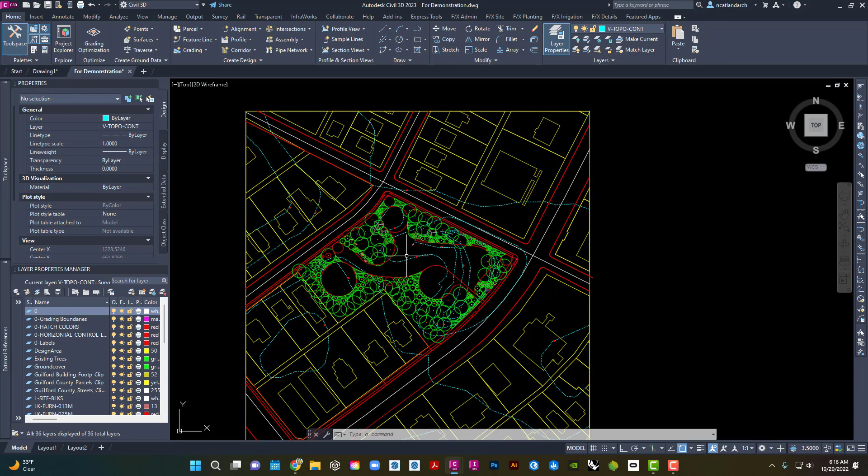First thing I'm going to do is make sure I'm on the horizontal control layer, and I'm going to trace out the outline. I can see it's not traced out, so let me clean that up some too.

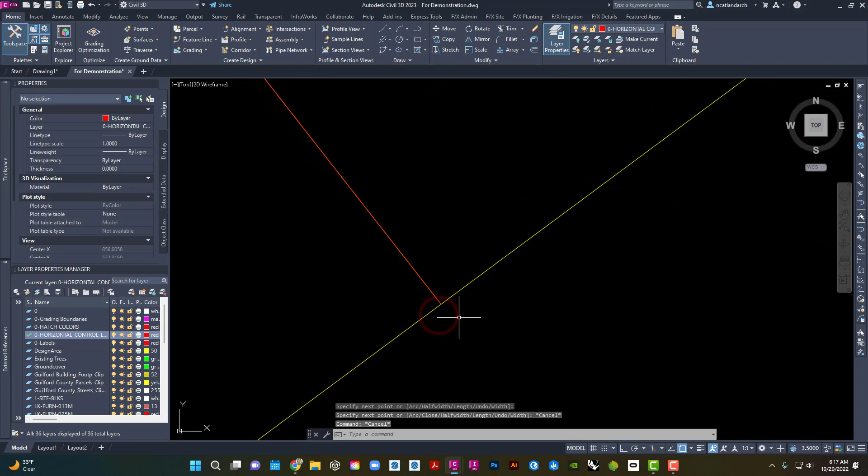I'm actually going to extend that straight through. Okay, cool. Now I'm going to isolate those.

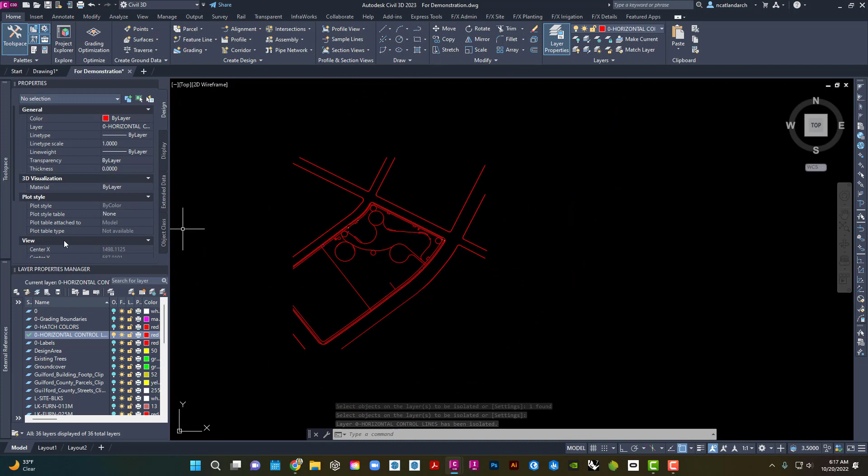The design area too, I'm going to go ahead and just put this on as a reference. I know for some reason this was acting funky — it's a 3D poly, that's why. I don't know if I can flatten this or not. No, does that work? No.

So I'm just going to do a REC and just draw in another. I'll turn the design area off.

That's fine. Okay, now these things, because we're going to make these roads too, I'm going to make sure it's clipped properly. I'm just going to do an offset, hit T for through, and just a little bit.

And I'm going to delete this one. Then I'm going to do a command called EXTRIM — click here, click on the outside, and it should cut everything away.

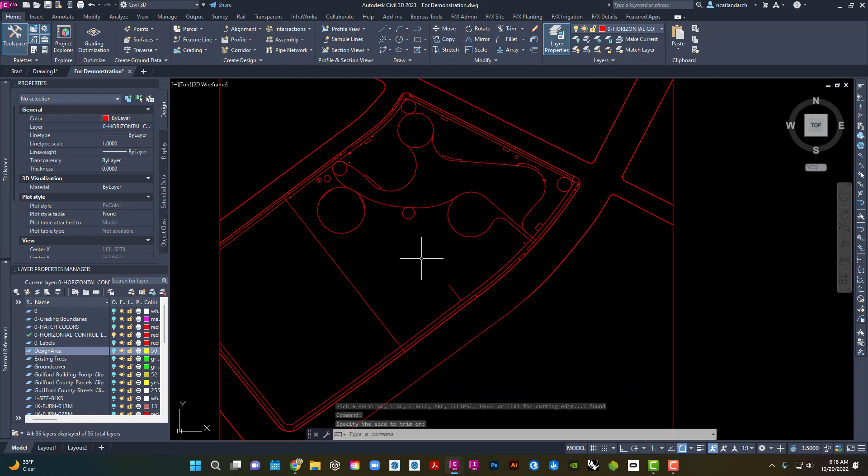Okay, now I'm going to clean some stuff up — not sure what that line is. It's very important this is done. I'm going to do an overkill first, and this is going to delete any overlapping lines. So three overlapping objects were deleted.

That's good. And then things like this and things like this you want to fix here, so I'm going to trim.

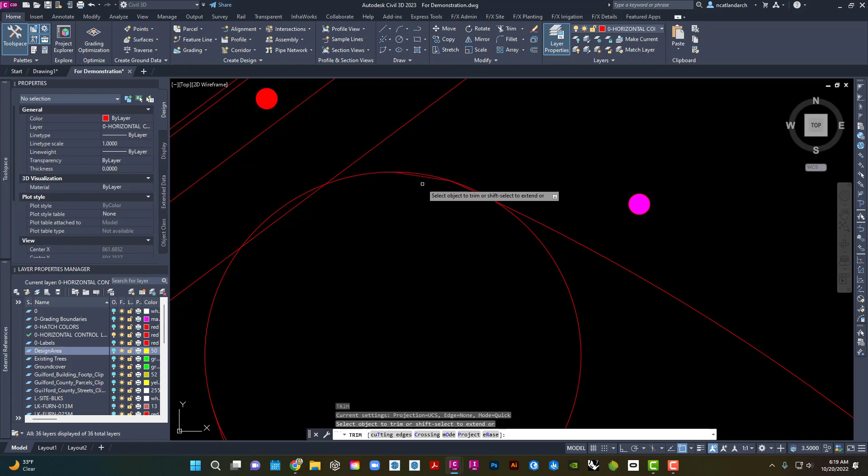Actually I'll do a break for this one, and then just extend it here, overlapping like that.

It looks like it's connecting. That looks good.

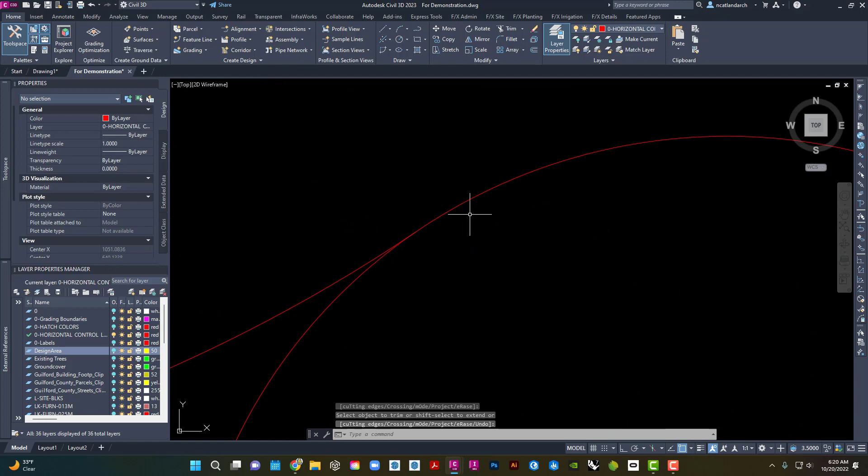Okay, so over here I'm going to have this thing. That looks pretty good to me. Just trim that out.

Make this a little bit bigger just for the sake of it.

You should also move your elements. I think there's that electric utility wall box that's on site, so you want to make sure those things are placed appropriately.

So I'm going to delete. I'm actually going to move this over.

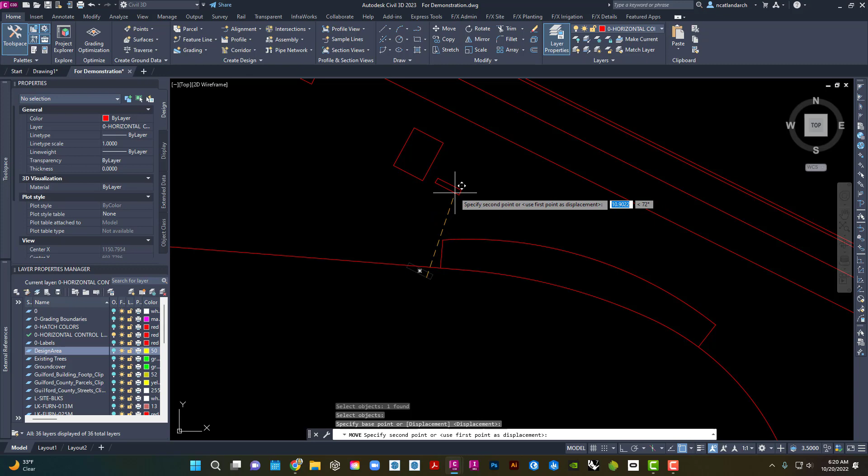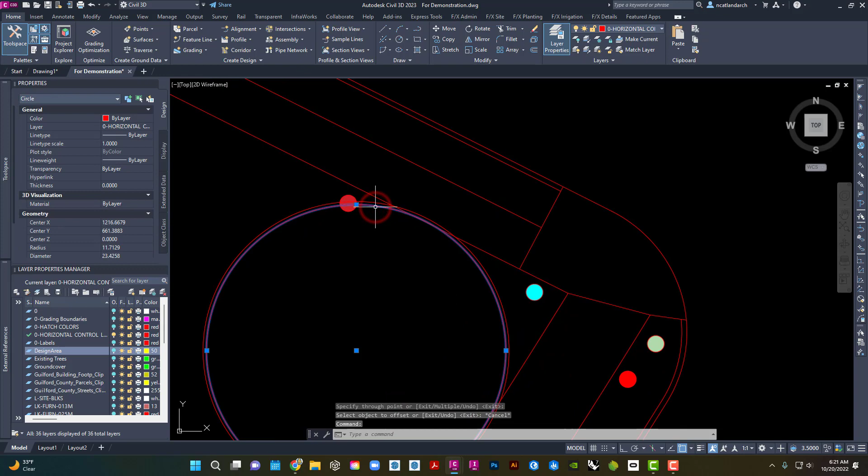Or maybe you're clever and you build it into the bench, and we just delete it. And then this one, offset a little bit too — and we offset a little bit more.

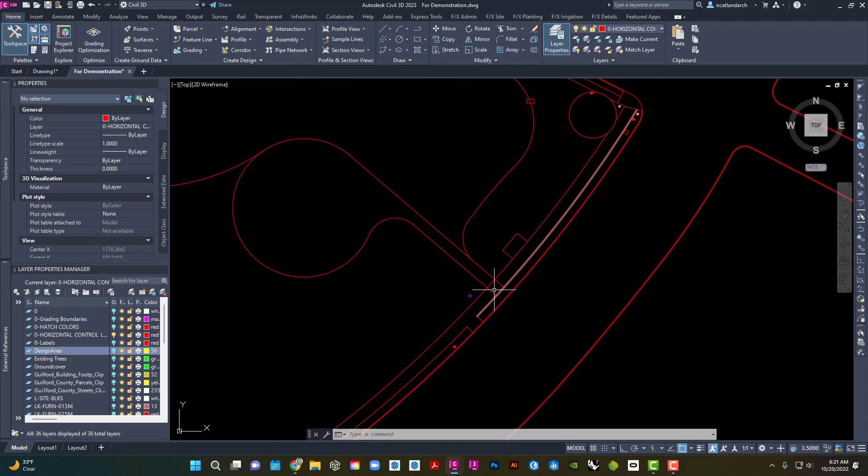And then if there's steps and stairs and things, I believe Abby has that in this one — you need to put those things in here now as well. I'm going to let this ride so we can just see it, but that would need to be done.

Okay, and I might just do one more overkill.

Okay, and I think I can do a thing called an audit as well — fix any errors, yes. Okay, cool, so we're in good shape.

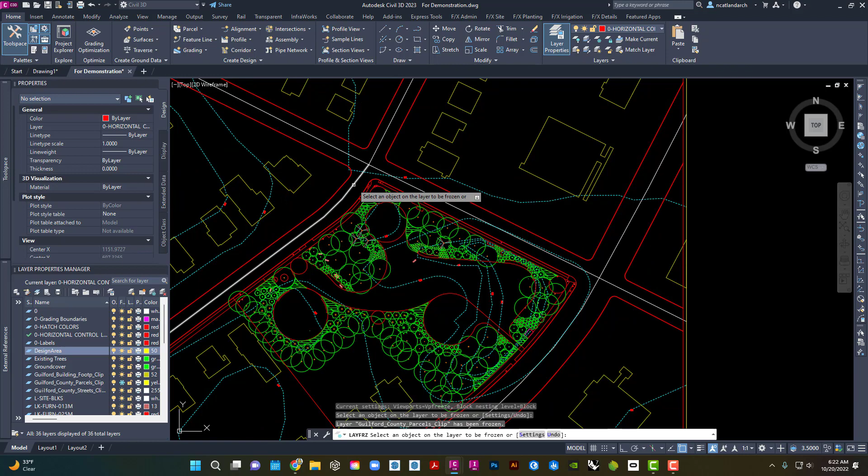Now what I want to do is just do a layer on again, because I want to isolate the layers that I want for this — layer freeze. I don't need that, I don't need the center line, I don't need contour labels, and I don't need the design extents. Okay.

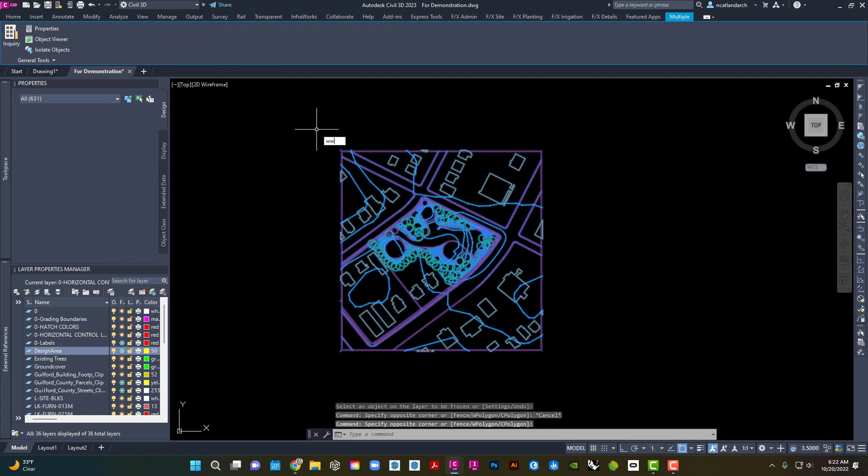So now what I'll do is just create a W block from this. Desktop, I'm just going to say that's fine. I'm going to say V2. Okay, yes. Okay.

Now I'm going to go to my SketchUp. I've modified my template so that when it comes in all the way. Alright.

I don't have any profiles on — my dashes are on, but profiles are off. I'm going to go File, Import. Options, make sure my feet, and say Import.

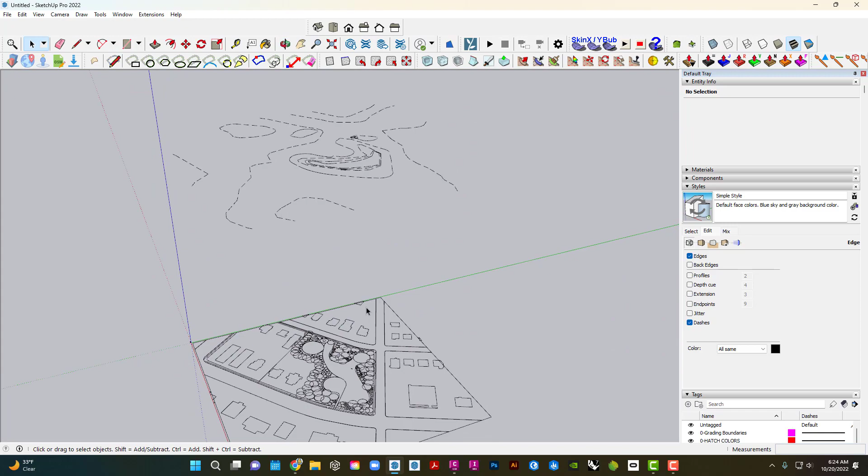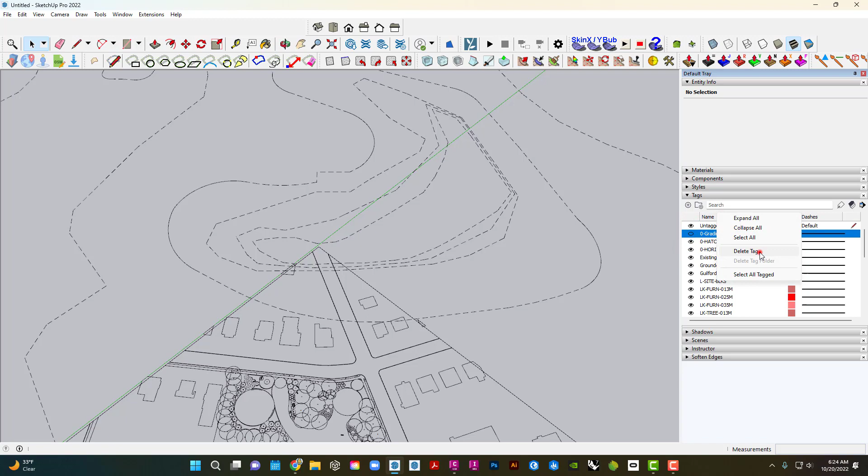Okay, there we go. I'm going to click on this and explode. This layer, I believe, is my grading boundaries, so I'm going to get rid of those over here. Just delete that tag and delete those entities. Okay.

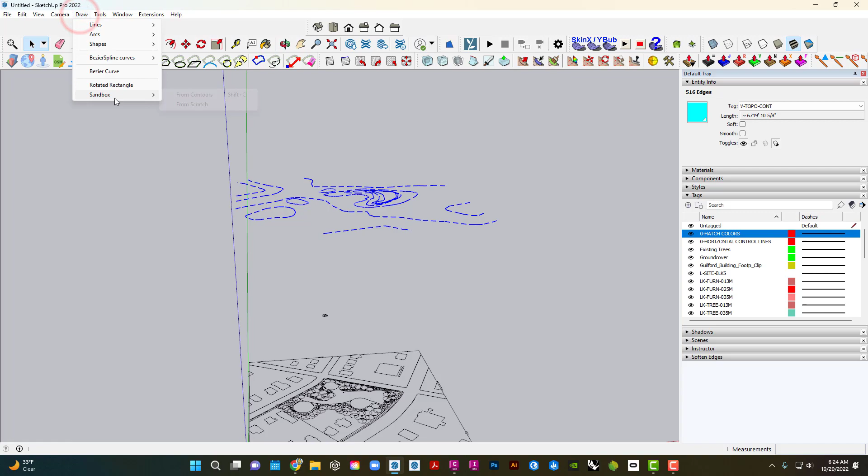So I'm going to grab these geometries and I am going to go to Draw, Sandbox from Contours, and get my terrain mesh.

Now, what I want to do is drape this information onto that. I'm going to turn off my plants and trees, even the contours for now, and again I want to focus on — I'm going to turn off my buildings as well, and I just want to focus on also this ground covers, the horizontal controls, this flat work if you will.

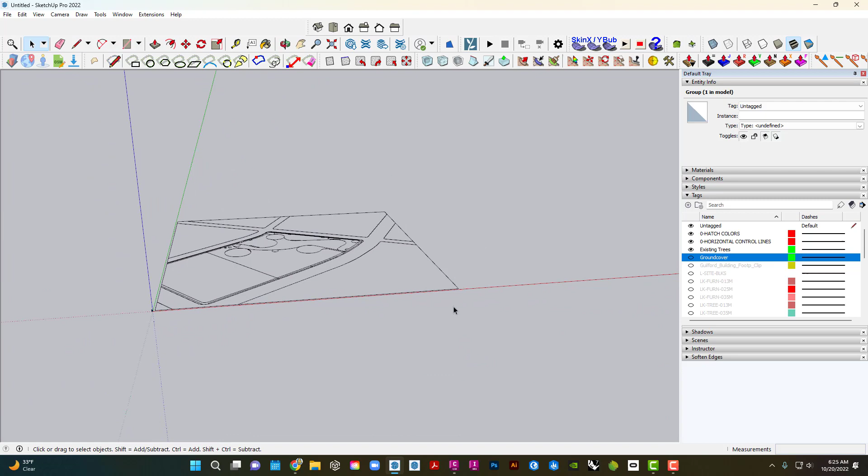Okay, so then I'm going to grab that line work — oops, grab the line work — and I'm going to go to drape, drape the information. Okay.

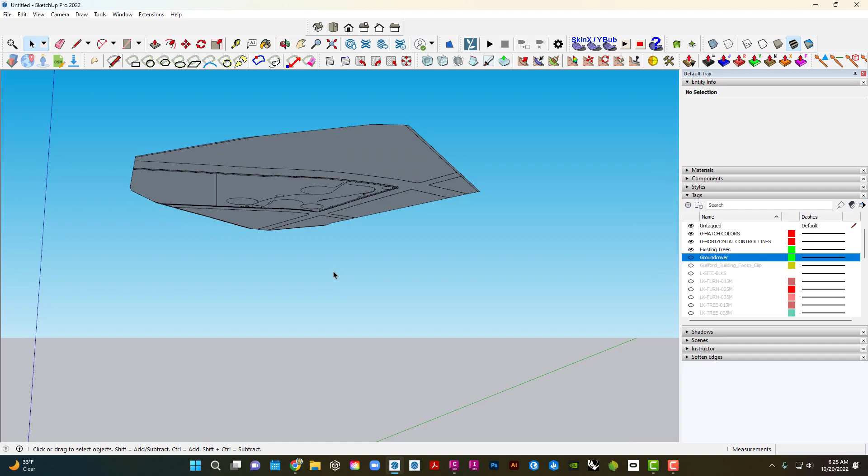So let's see what we have here. So it didn't make faces on everything, unfortunately, so I'm just going to explode this so we can more easily access it.

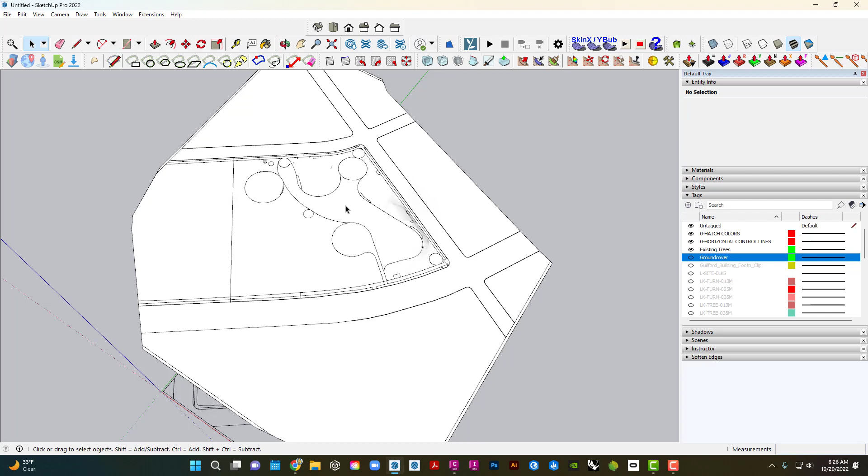What is that? No, okay, I'm not going to explode them. Let me bring that down some.

And what I want to do is double click in here and go to Tools and Edge Tools. I have this extension, Edge Tools, installed — find edge gaps, so there's still quite a few.

Some of these are going to go with easy clicks and help generate some faces for us. Okay, some funky anomaly stuff, and the rest I'm trying to let the computer do — Edge Tools, I'm going to say just close all edge gaps.

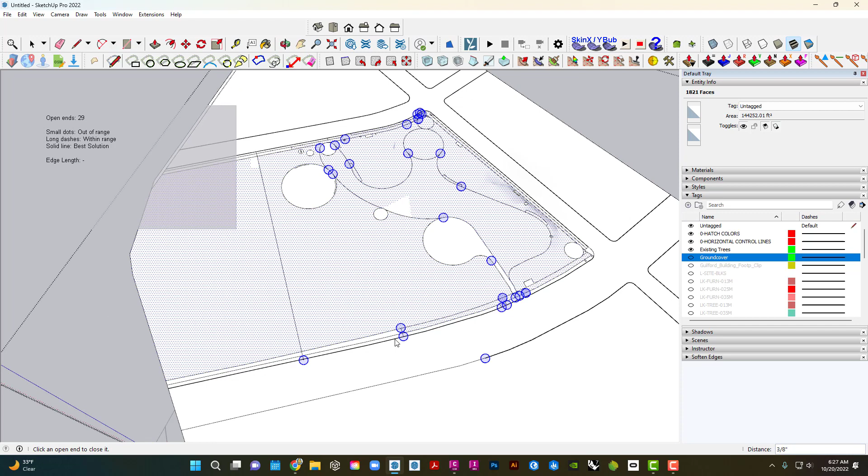Alright, tools, edge tools, find edge gaps. Okay, I'm going to come in here and manually start doing the rest of this. In these little small areas you should be able to draw on the surface just to kind of close those things out.

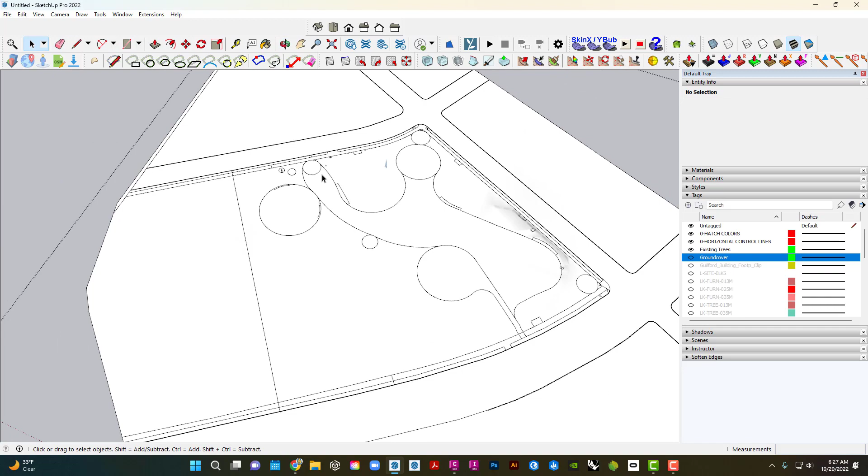I don't know how I did that. Okay, no worries, we'll just delete those extra lines. And depending on your line work, this may or may not happen to you, but be prepared for cleanup.

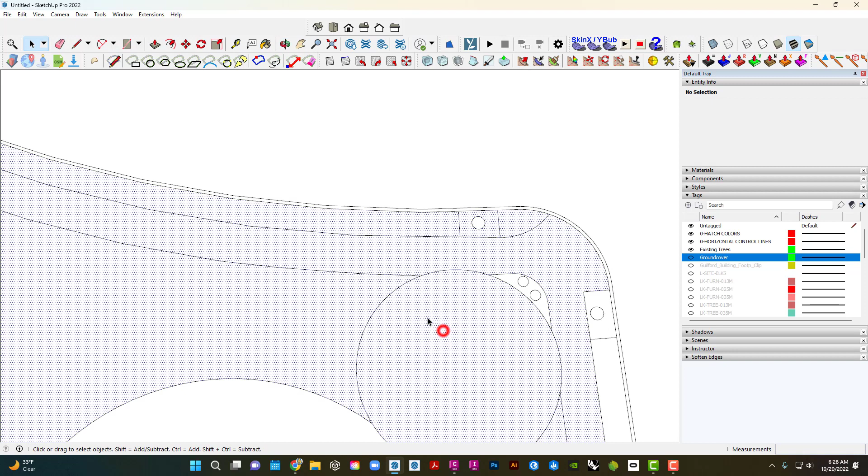I'm going to go to tools again, edge tools, find edge gaps. So I think we fixed that one. Just in case we didn't, I'm just going to go to my tools on surface. This is also an extension that you'll see, download from Blackboard to install. That allows you to draw on a rolling surface. The native tools will not really allow you to do that.

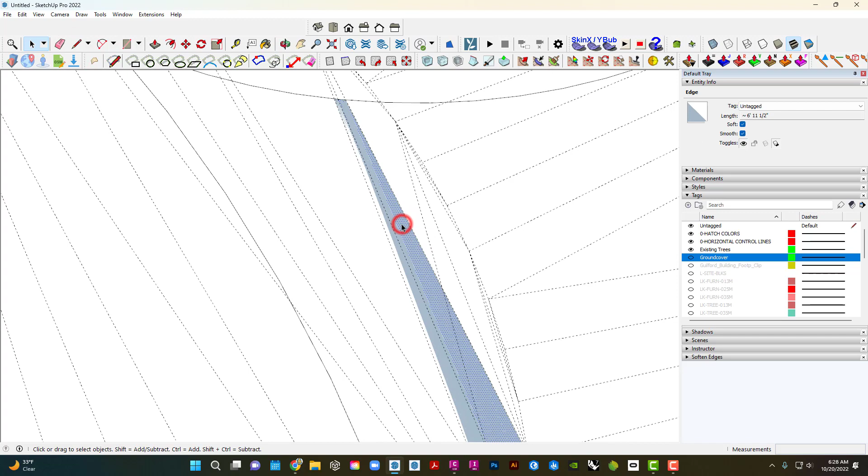You have these anomalies, I'm just going to go to view my hidden geometries while it's done. Create maybe these extra faces. And then view, I think there's another area too. Maybe not. Oh yeah.

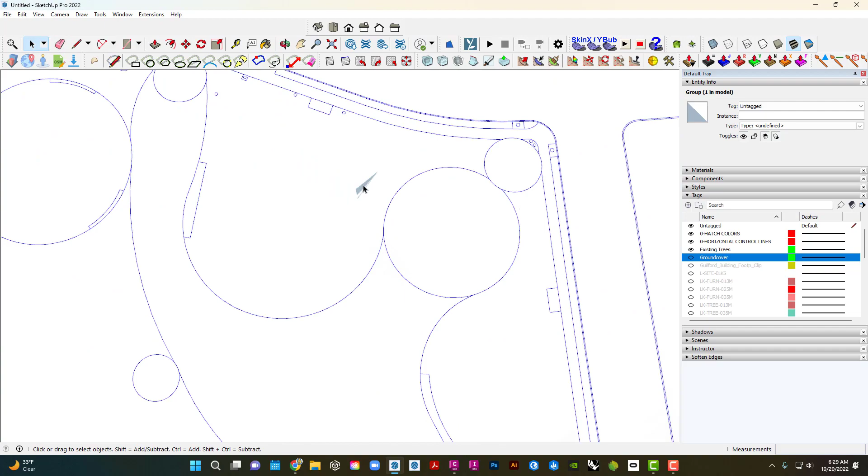Okay, better. Let's see what we're looking like. So I'm double clicking here. That's separated, but it's still got some spillover. Yay.

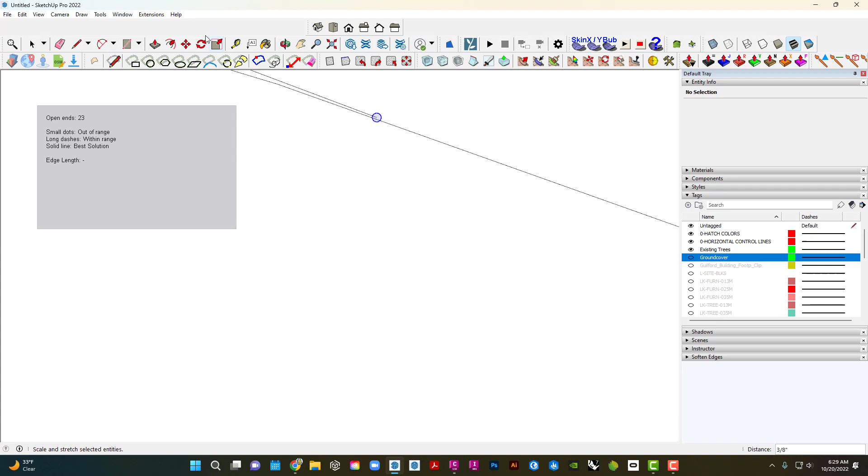Edge tools, find edge gaps. So I'm trying to figure out where these breaks are occurring, stuff like this. I have my edge tool shortcutted to Control E because you use it so much. Close that area, and that's closed. It's almost closed, Control E.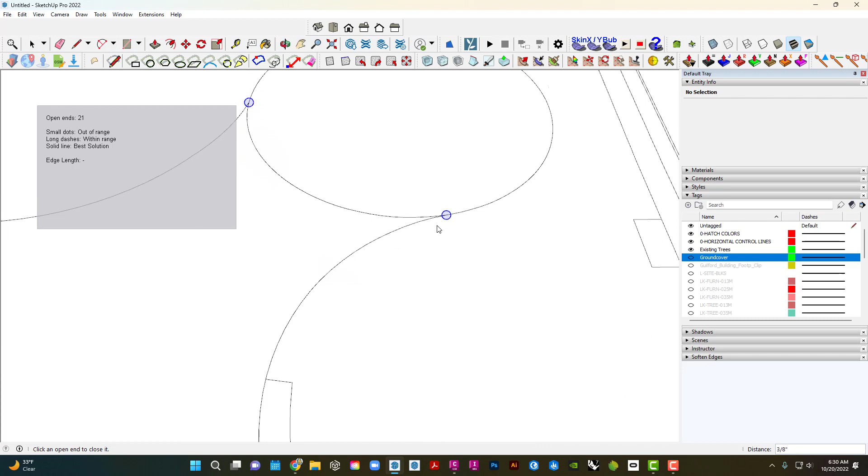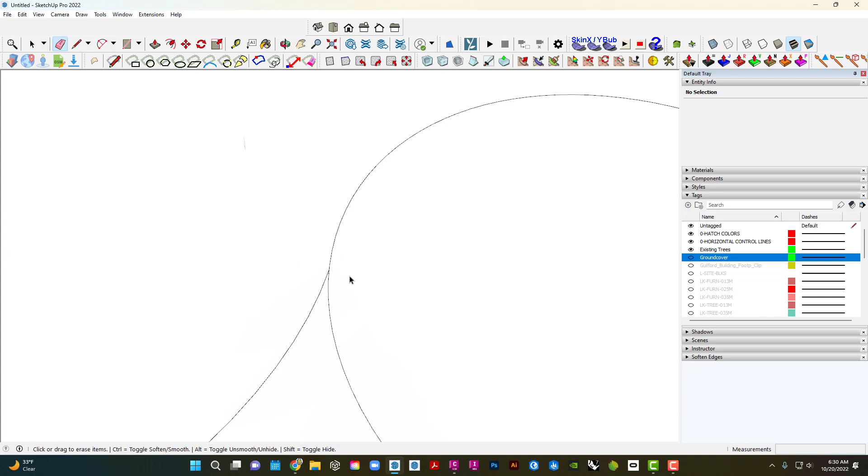Okay, Control E, same thing over here. So just kind of come in and cross that. Should be working now, cool. It'll be the same thing in all those curved corners. When it draped, for some reason it didn't make it. That's just extra line work.

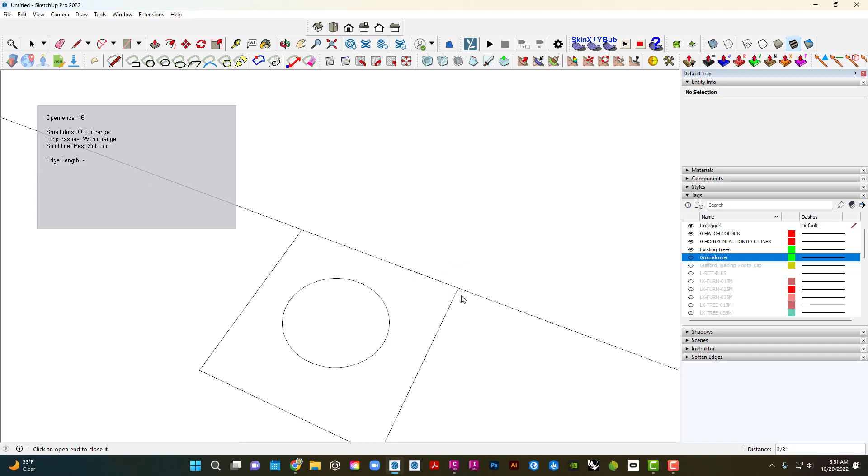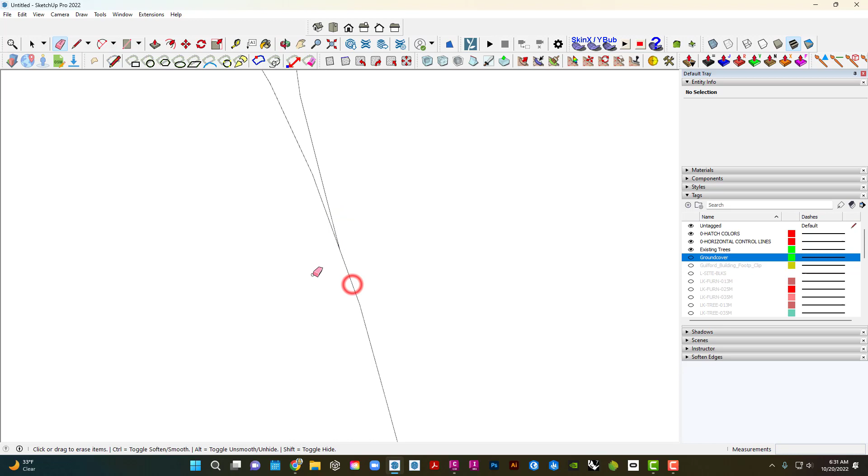Like it was connecting to me, so Control E. Something, that one went away. Control E. So again, on this curve, it didn't like it when it draped. This is probably the most annoying part about SketchUp. Drapes don't always just drape. Actually very annoying.

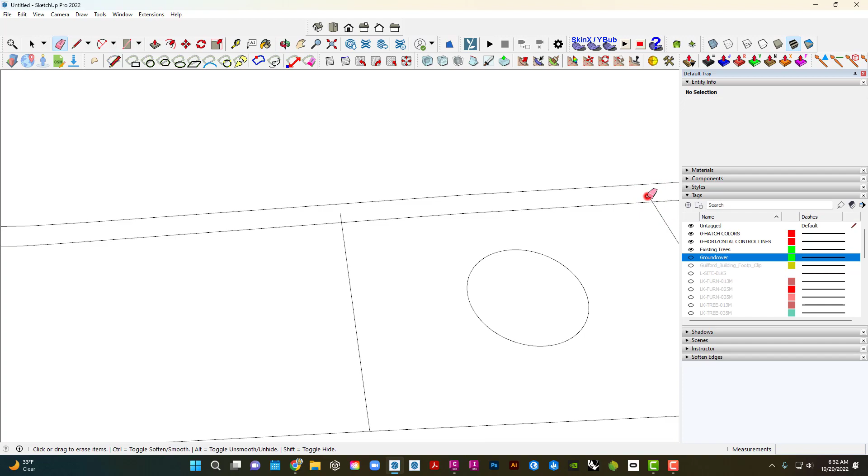Okay, got these. Boom, boom again, depending on your design, this may or may not be happening to you. Okay, what else, other issues. I guess we're still having here. Here it looks like, maybe there and there and there. Okay, I think I cleaned up most of this, almost.

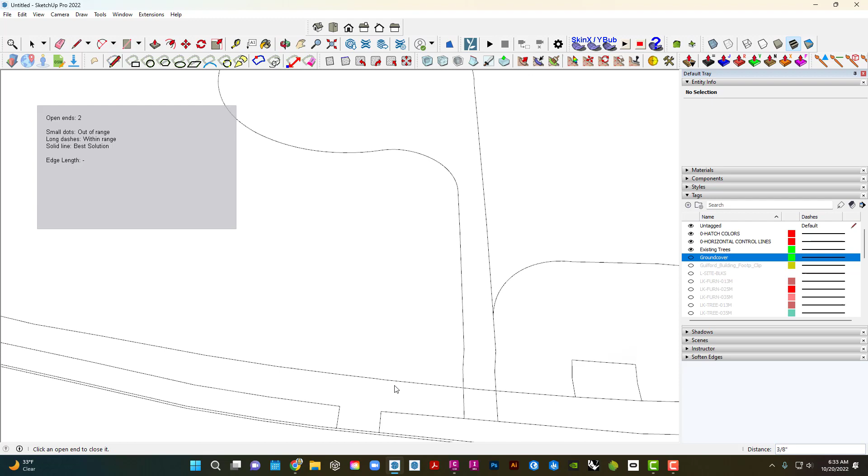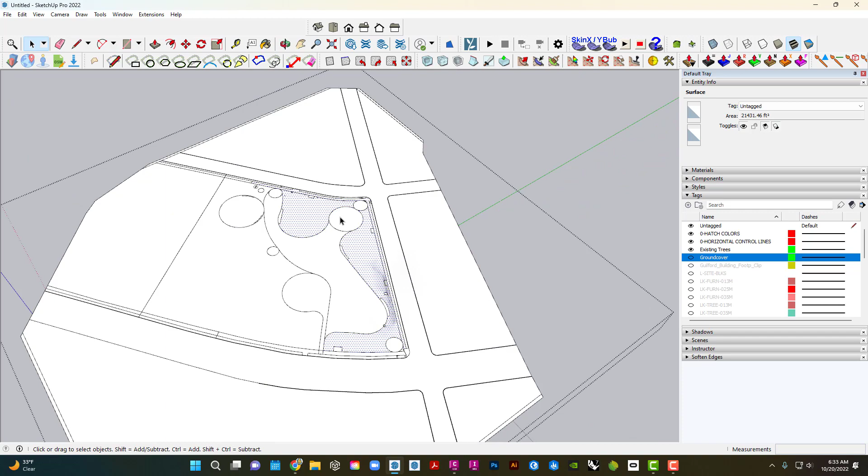Delete extra line work, where else do I have anything going on? I'm not going to worry about that. This I'll clean up too. Alright, what do you do when that happens? So there's still some spillover for some reason, so I'm going to go to my regular line tool and just, that didn't work, let me go to my...

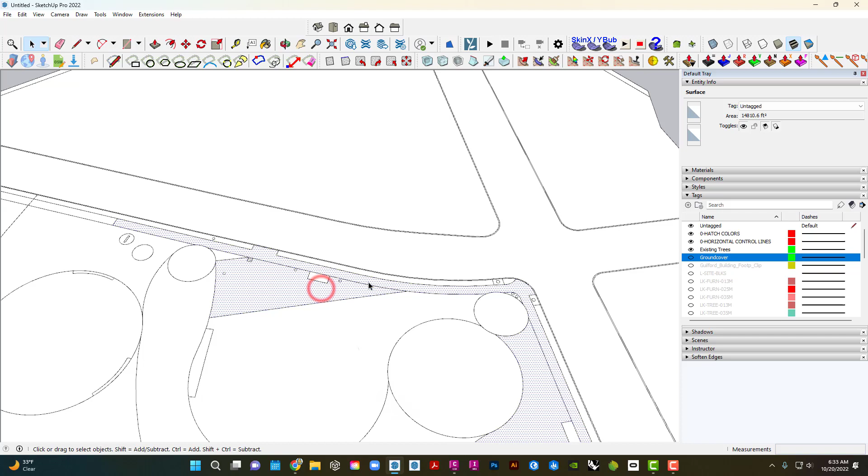So cut these things across and see. So it's not happening there. So now I'm chasing wherever this break is occurring. I'm not sure where it's happening, so I'm drawing these lines. Okay, so it's happening in here somewhere, trying to figure out where this spill is occurring. I don't see it. And edge gap is not finding it.

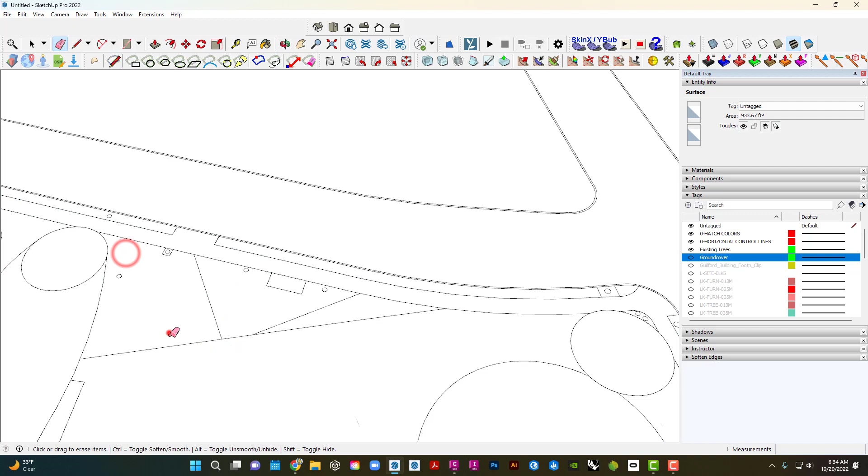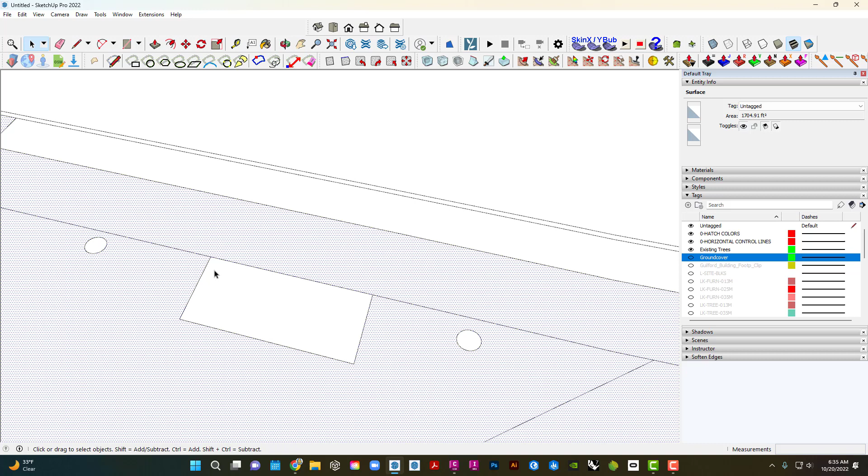God, I don't want this. Why it did that, I don't know, y'all. So I'm going to go back and now delete those lines. This is how I would troubleshoot them. Control E, it's not working. And then on this, over here, just draw a line straight through. That helps.

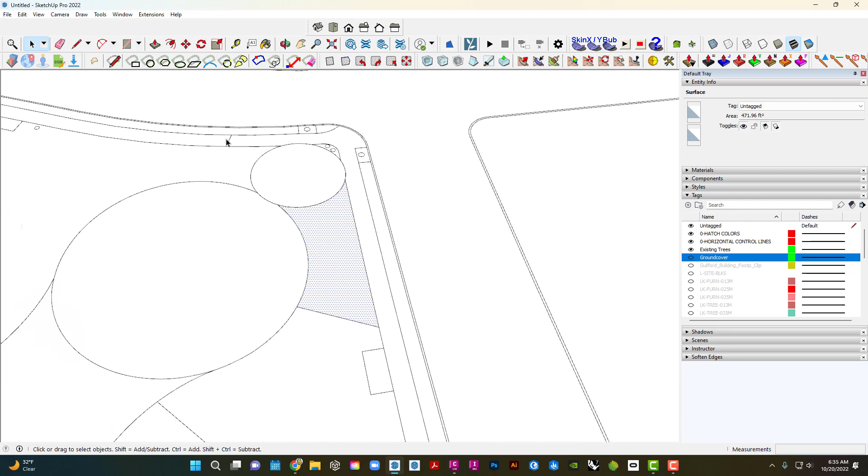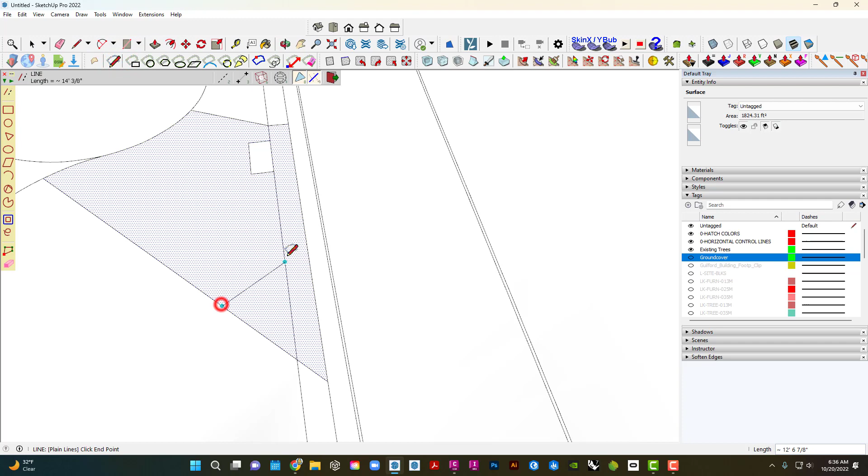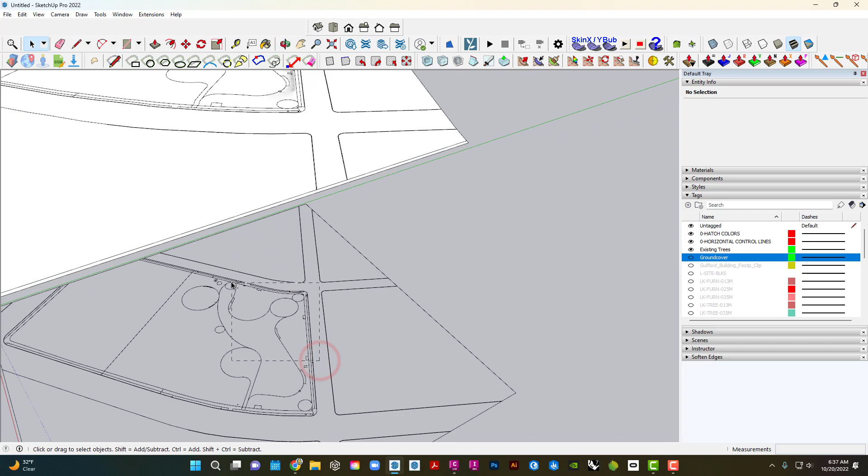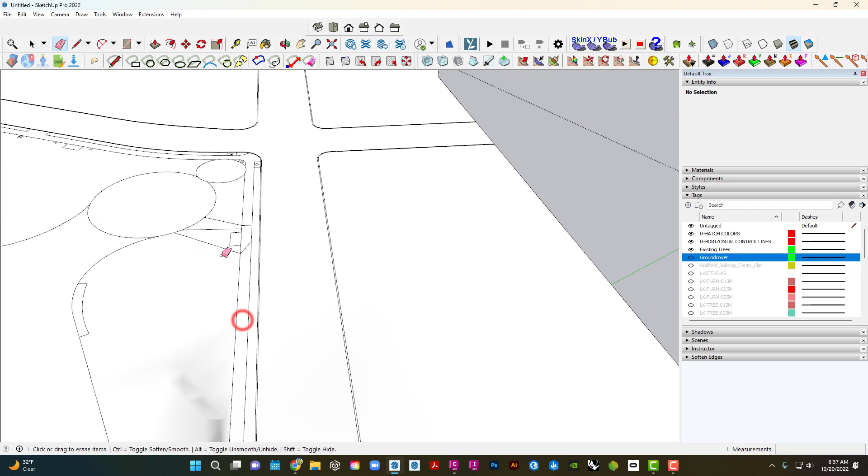Let's go on, I'm having an issue. Issue. And we created a double line. So combination of that and redraping. Looks like that works. Yeah, because that's what you need. You need all those spaces separate so that you can quantify them and drop the appropriate material.

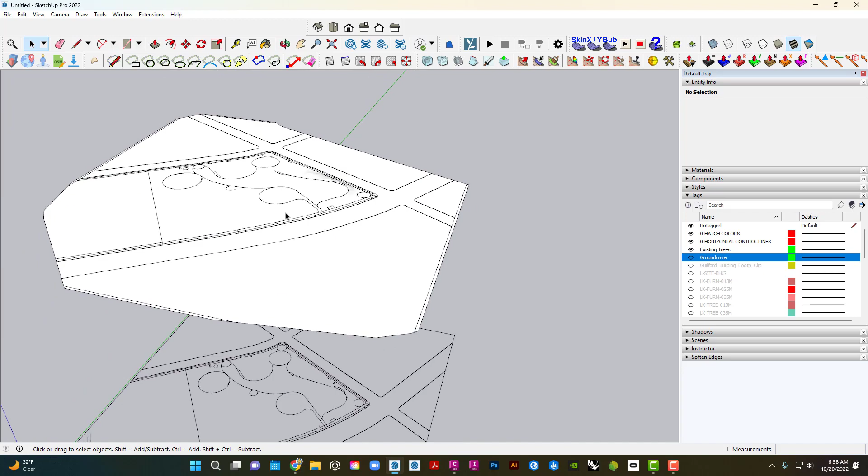So now that you have that done, hopefully your journey was shorter than mine. You want to start bringing over your other materials, your trees and such. What I want to do first is import the information we're getting from Blackboard for assignment 247.

Go into your SketchUp, boom, it is going to be the existing conditions elements. I'm going to go here and then say file, then import. I want this time SketchUp. And kind of bring those in, put them to the side right now because I need a reference.

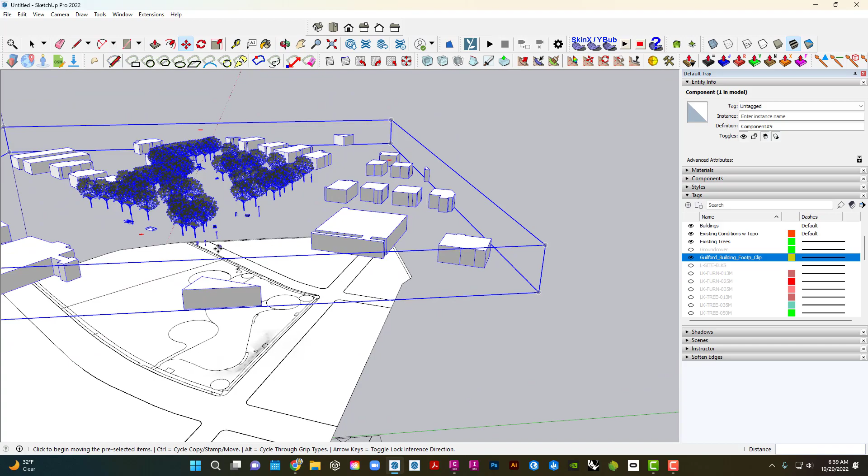So I'm going to turn back on my footprints. And I'm just going to grab and align it and lock my axis using my move tool. Just bring it up. And then I'm going to bring it right down. Should align, come straight down and make sure that that touches the ground.

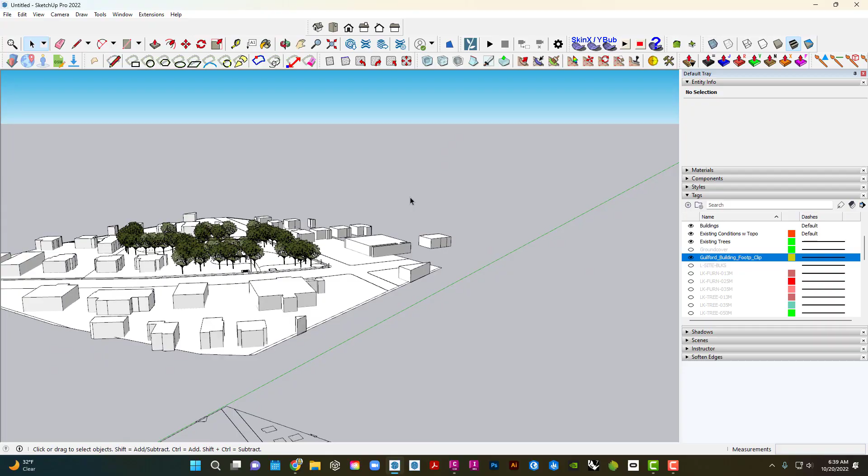And there you go, so now you have kind of the existing conditions elements there. Then once you have that, you can just click on that and explode it so it's part of your model. So now you have your buildings and the existing trees there. And then I can double click here and then you can start adding some quick color, to help me see what's going on.

I'm missing my line there. Oops. And then maybe some.

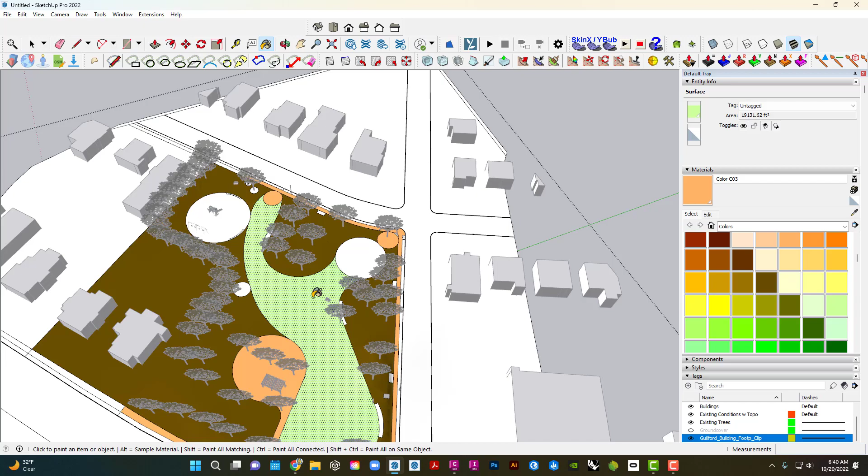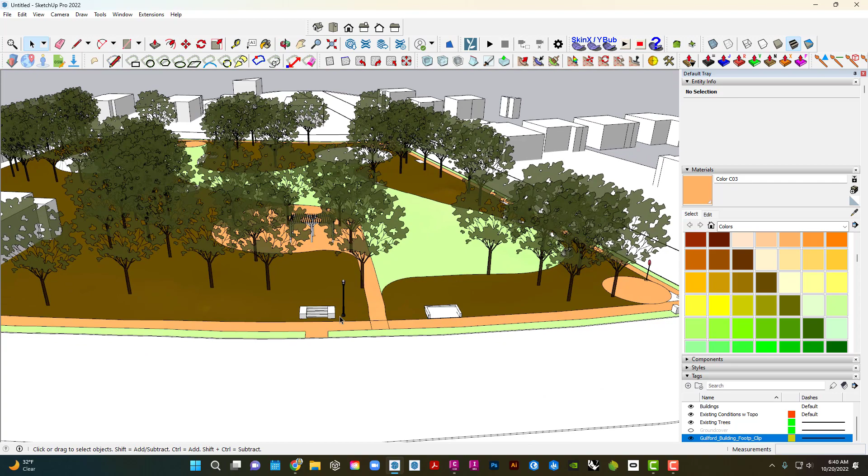Then I'm gonna sample. This is Alt on my computer, and then that was a green strip there. Unless you don't want it to be, you can change that out. In this instance, we have these things here. Of course, in Abby's, she's actually moving this over, so she's something like that, actually.

And then the other elements, of course, you want to make sure your benches, she's going to have shrubs and stuff that are going to be here in a moment, and make sure those elements are not in the way. But then once I have that, I will turn off those horizontal controls in my buildings again. And what I want to do is turn on, what is that? Put those in horizontal controls.

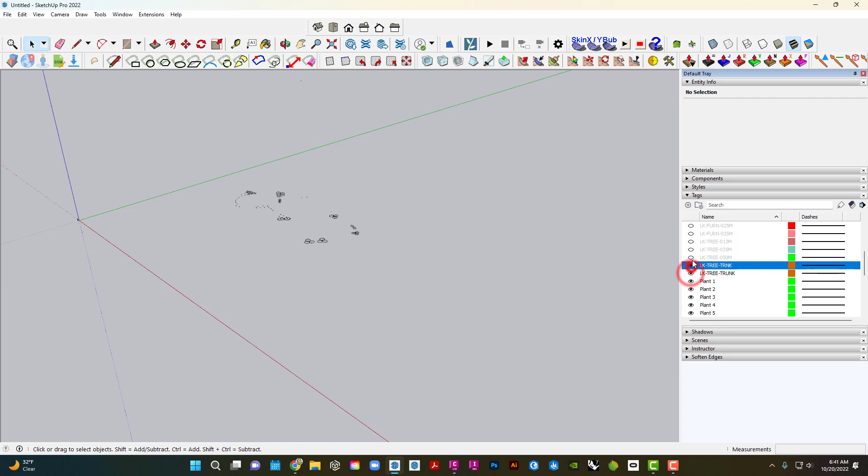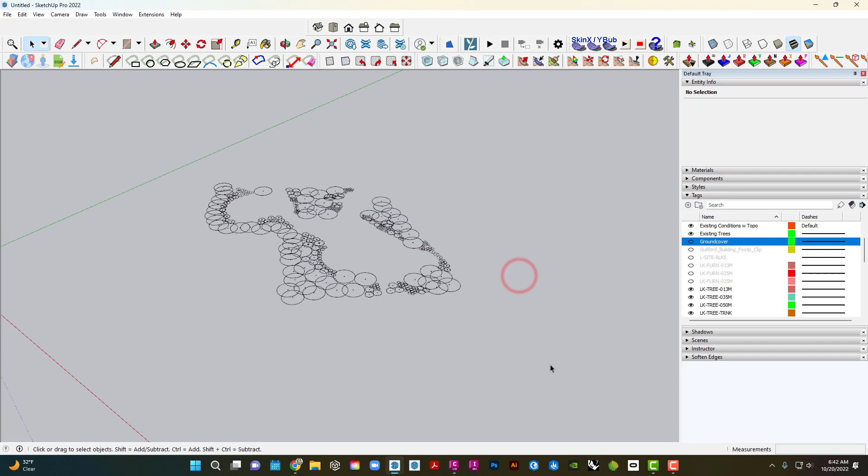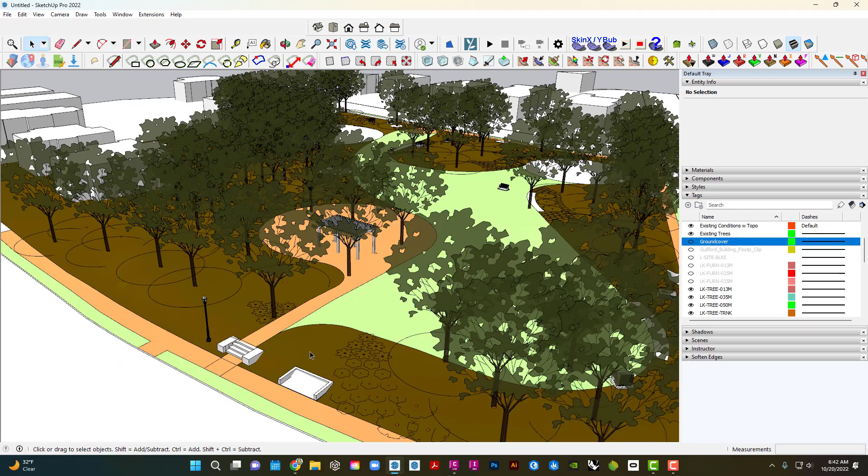You guys don't have that plug-in though. Okay. She has that. I'm gonna shift all these up, and then right-click and then drop GC. Okay, cool. So stuff should be aligning nicely. It is. Cool. And then she had those anomalies. These need to be blocked, so a way to do that is just to quickly kind of grab one, maybe, just to demonstrate.

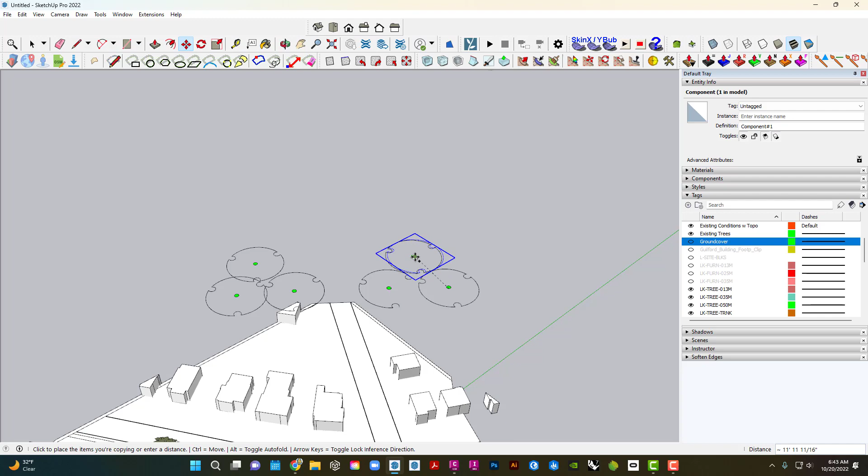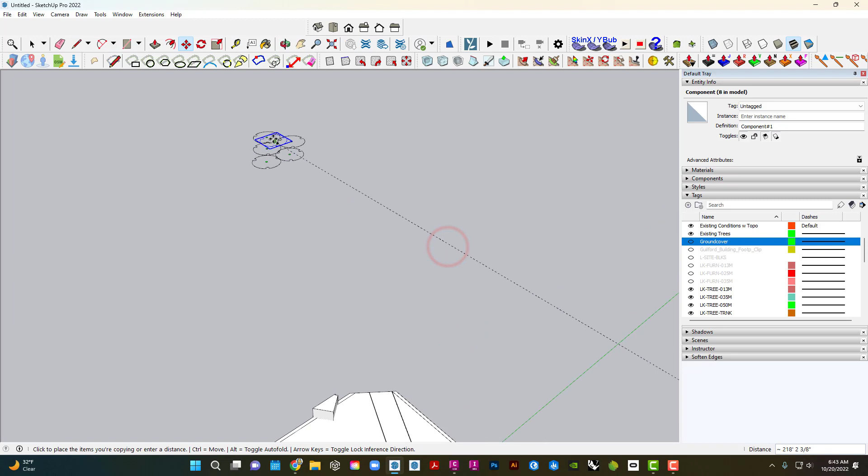So I'm going to take one of these and actually turn it into a component. And quickly put these over here in the general area. And I'm going to drop GC those as well. Again, I'm just kind of showing you how I'm troubleshooting her particular project. A little different for yours, but showing you how you can do it. Okay, and then grab those and then drop GC. Okay, the rest of those go away.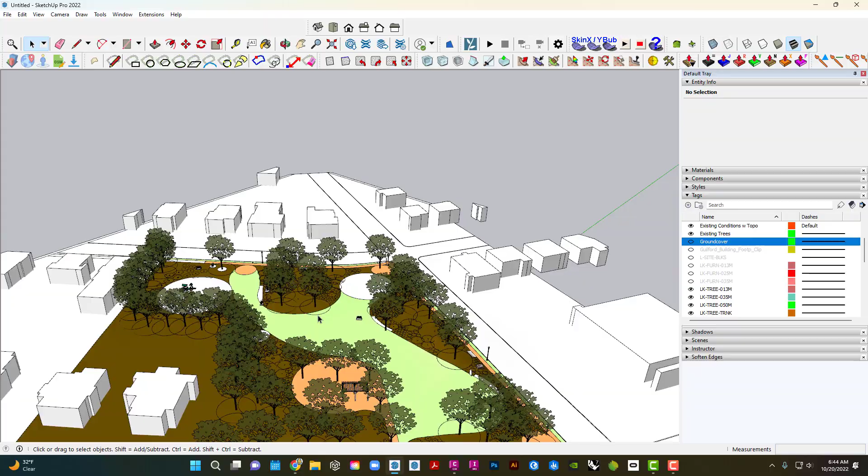So now I have our plants placed. So we're kind of getting there. You see the brick going around in these little areas. And okay. Still seeing some anomalies in here. But easy to fix. I should just go and delete those extra lines. And I want this to be that. Oops. There you go. There you go. All right.

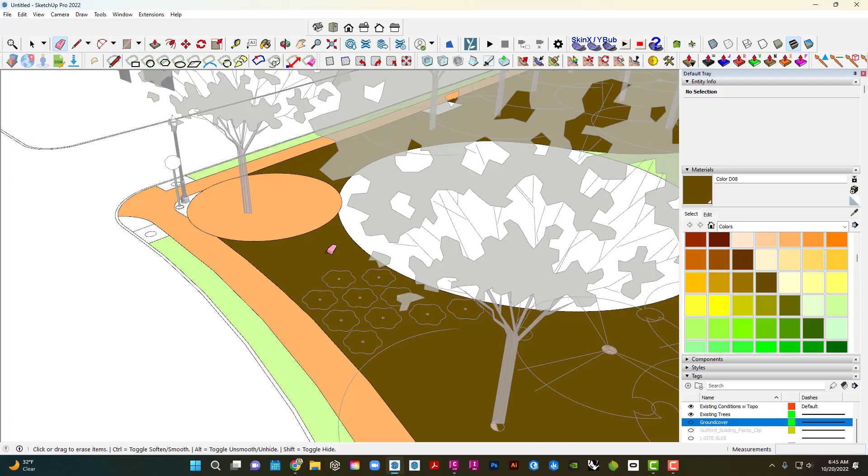Next time you can go in here, and of course she needs to move these elements around and you need to adjust these things and make sure that your design is responding appropriately to the topography. And then what you do is find the plants that you want to use. So I know that she wanted red buds for one of these. So let's see if we can't find a red bud in the 3D Warehouse. I'm logged in, so I'm just going to do red bud.

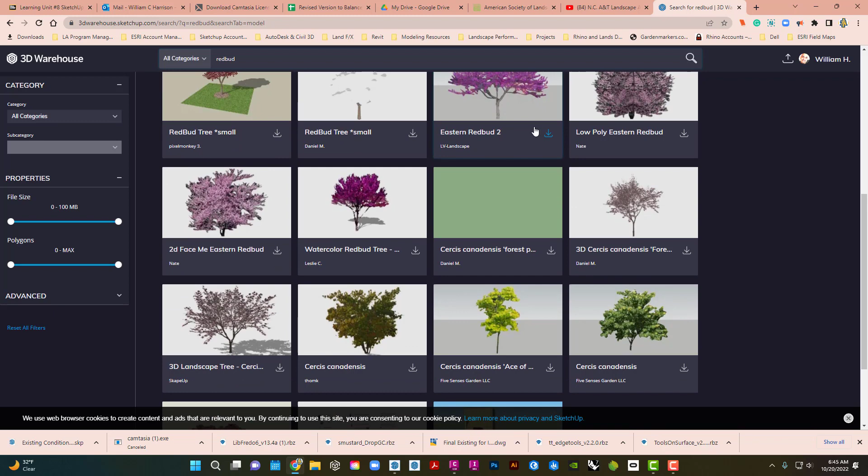Okay. So let me see if I can't find a watercolor red bud, 2D face-me red bud. There's a nice one. So I'm going to download that. You want to try to avoid 3D trees because they'll make your model really heavy. I'm going to actually just file and then import that red bud and bring it in. I don't know why that's struggling. Oh, because it's 3D. That's why you don't want 3D trees directly in your model.

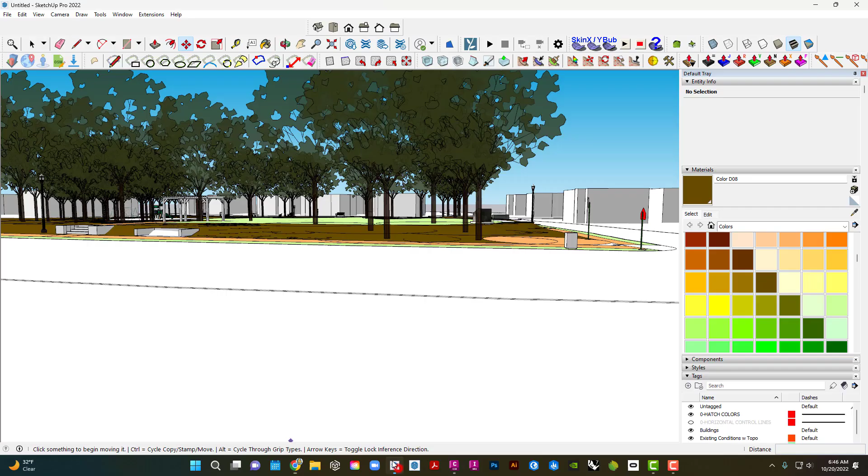Let's try to find another one. So it's a 3D. It did say 3D, didn't it? I guess that was a giveaway. Let's see this one. Okay. And file. This will import a lot faster too. Bam. Cool. So I have a little red bud tree there. It's a multi-trunk, so I'm going to bring this in. Now I have the ability to make it bigger if I want to. That's about right though, it seems like, for this.

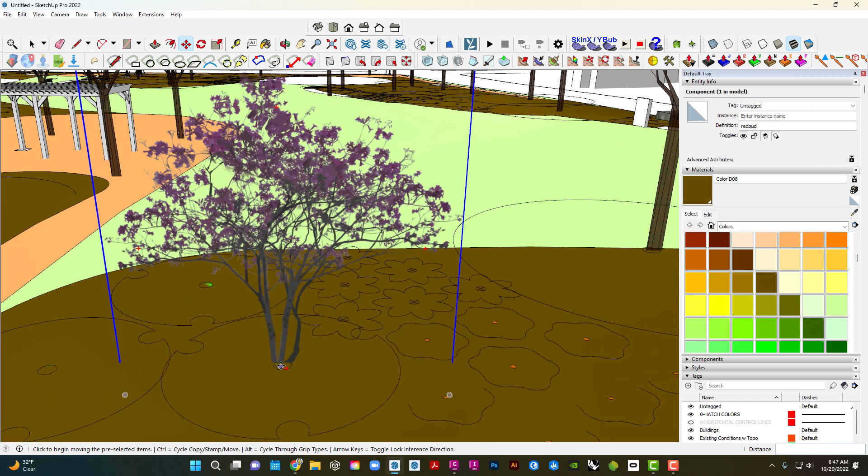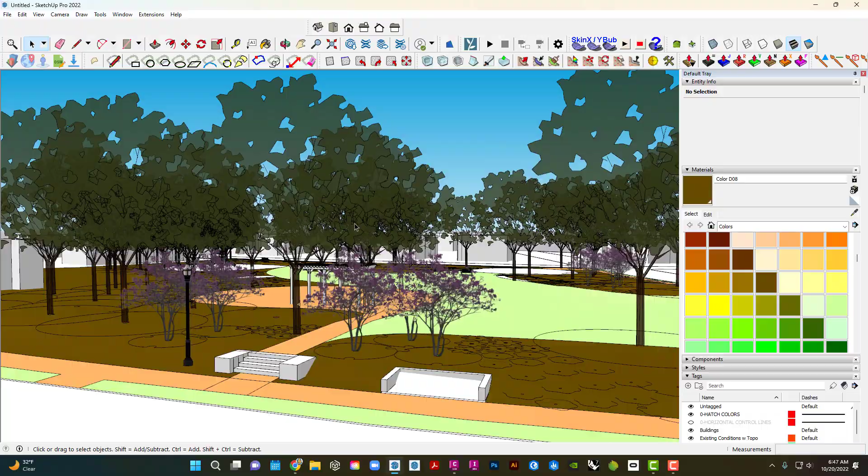So once I have it placed where I want it in the center, I am going to edit and cut and double click in this, and then edit, paste in place, and everywhere that block is, those red buds will appear. So bit by bit you can begin to make this thing your design using kind of decent approximations of the plant material that you have. Again, we'll do one more.

I'm not sure what she had over here, but let's say that she did, like, I don't know, arborvitae. And maybe it's something like that. That one looks good. Maybe it's a Thuja. Okay, so I'll go here, bring this over, file, import. You see that Thuja. It's 3D, but it's low poly 3D. Okay. I'm gonna put that here.

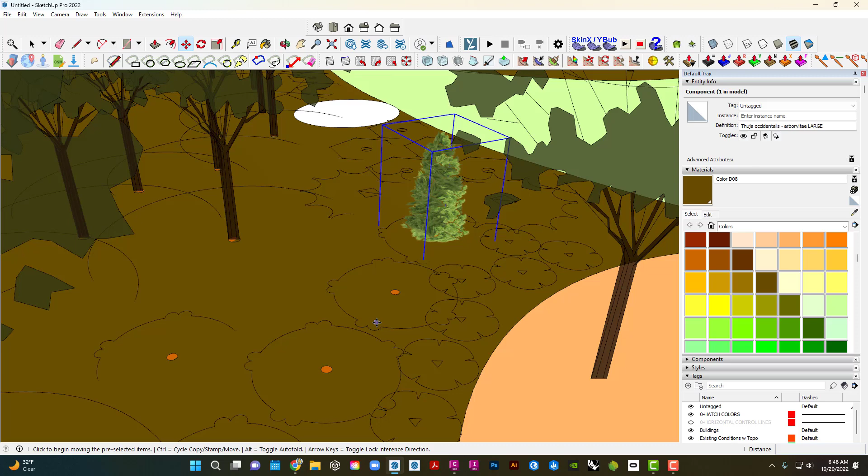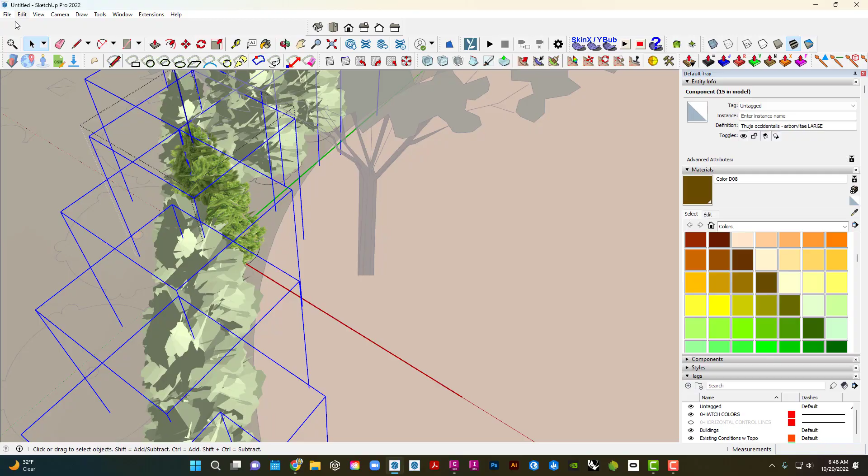That's right in the frame, isn't it? That's all right. So then I'll just cut this thing out. Oops. Actually, let me paste it here. Probably not what she intended, but I just want to see. And then here, I'm doing edit, paste in place. I have it just shortcutted. So I can put those elements in, and then boom, you kind of have them everywhere in the space.

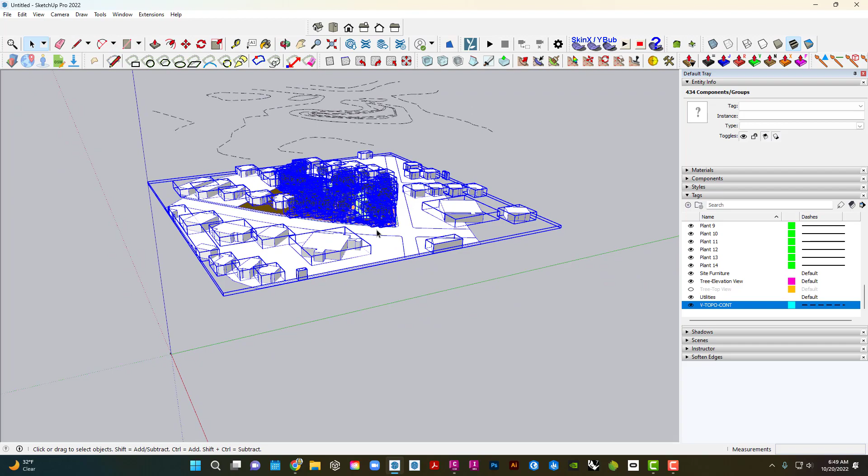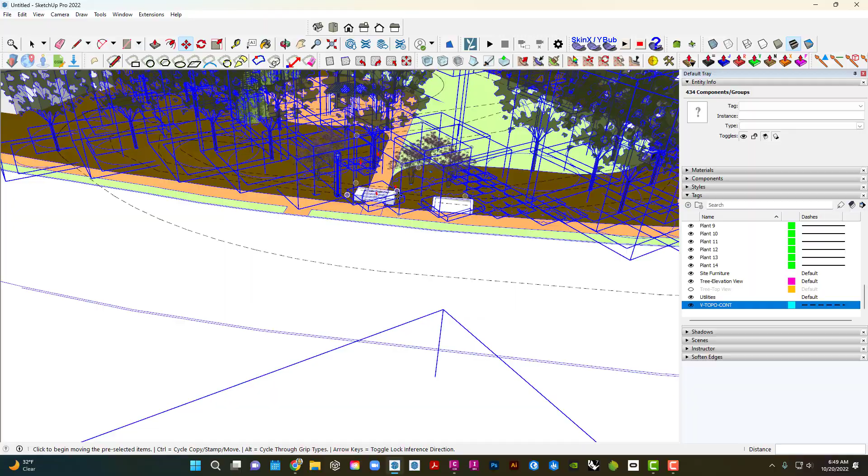So anyway, you'll do that, and then you can have your contour lines back on to begin to, hopefully, oops, I shifted it all down. Let me bring it back up. You know, you can begin to see how this thing is relating to your design. Oops, still floating a little bit. There you go. And just so you can see how it relates again to everything, which is nice.